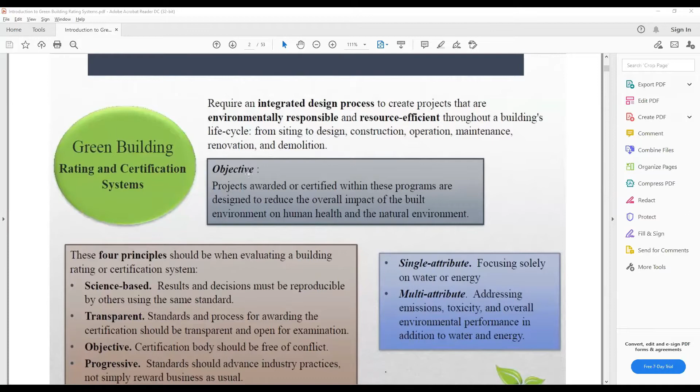Before discussing Indian rating systems, I'd like to start with where it all began. This is the first rating system that started in the world — it's a UK-based rating system called BREEAM, full form Building Research Establishment Environmental Assessment Method.

BREEAM is governed by BRE Global, the institute that governs this rating system. It started in 1990 in the UK, and now it has spread to almost 30 to 40 countries. Even in India they are trying to bring this rating system, like BREEAM India. But it's mainly famous in the European Union and EFTA, the European Free Trade Association countries. Currently, there are almost 530,000 certified developments under BREEAM happening all around the world.

What I called attributes earlier are mentioned here as categories. Every rating system will have its own categories. BREEAM has 8 categories. The building or project will be rated based on its performance under all these categories.

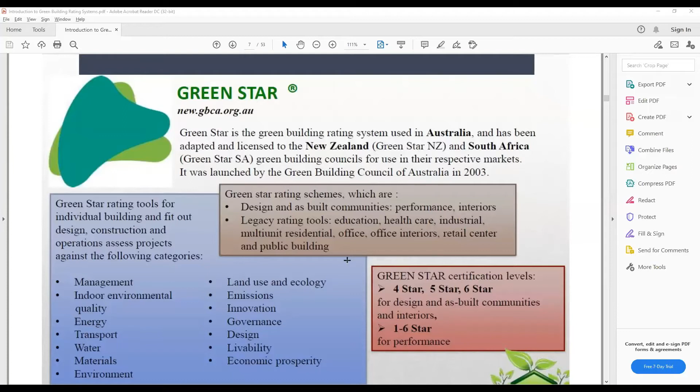Next is CASBEE. This is a comprehensive assessment system for built environment efficiency. This is based in Japan, established in the year 2003. It has 2 categories, and those 2 categories are divided into three sections each. Under quality, you have indoor environment, quality of service, and outdoor environment of the site.

And under loading, what can you do quantitatively - energy, resource materials, and outside environment come under loading. This loading part will exactly assess the environmental load through these sections. But the quality part will see things in a qualitative way - indoor environment means you can say the indoor environment is good, better, or best, like that.

In energy you should say the energy is 14 kilowatt hour or 15 kilowatt hour, like that we can say. So this CASBEE has 5 levels, S being excellent and C being poor. Anything above B minus would be good in this CASBEE certification.

Next is WELL. This is a single attribute rating system. This focuses only on the health and well-being of humans. This is the only standard that is purely focused on human health and well-being. It has almost 100 criteria with it, and based on these 100 criteria it will judge the building. It won't talk about energy or light or something like that - everything it will talk about in a qualitative way.

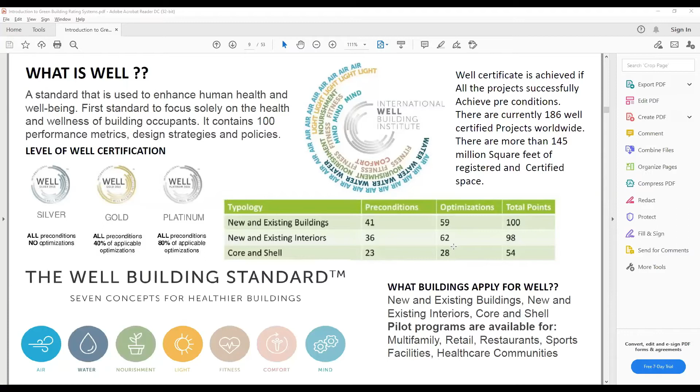Now the green building movement in India. The registered green buildings started in the year 2001, with CII, Confederation of Indian Industry office headquarters in Hyderabad. That is the first green rated building in India, almost 20,000 square foot, and it is a LEED platinum rated building.

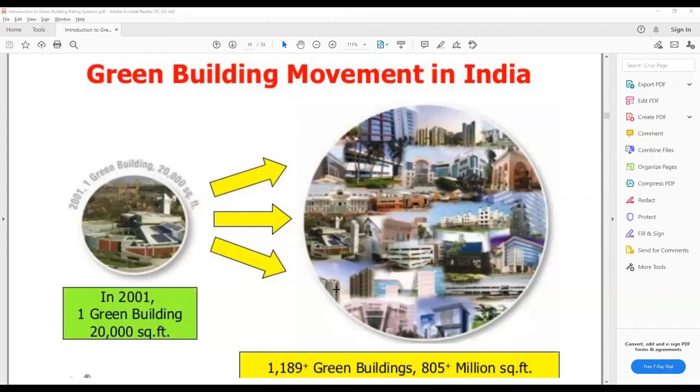After that, it grew to around 1,200 green buildings and almost 805 million square foot. This statistic is from 2011, the last decade. Now it has reached almost 4,000 to 5,000 buildings, and we are touching that range now.

But throughout the years, if you see 2004, 5, 6, 7, 8, almost by 2009 itself, the increase in cost percentage was only 2%. This happened because it was the first green building built, so there was a lack of technology and knowledge. But through many trial and errors, research and support, the cost percentage came down to almost 2% now, which is very nominal, because this 2% comes back to us as payback period.

This is the first rating system formed in India, the Indian Green Building Council, as part of the Confederation of Indian Industry, CII. It was formed in 2001.

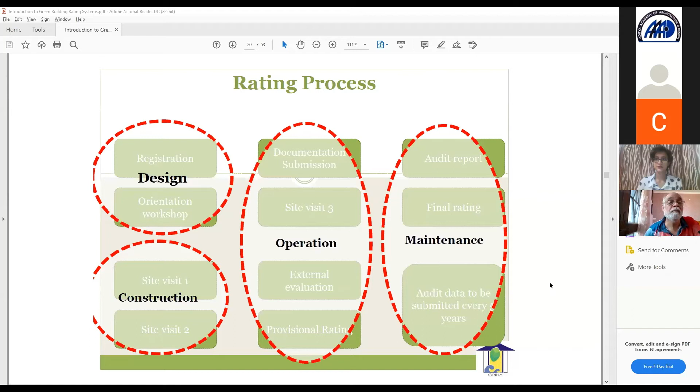Some key features of the Griha rating - it adopted codes like NBC, ECBC, MNRE, and the Bureau of Indian Codes and Standards. Griha studied all these things and tried to implicate all these codes in its manual, so that the building will perform well, because all these codes have been developed to promote good for the buildings only. So Griha tried to implicate this also in its manual, and it is in sync with the objectives of the National Action Plan on Climate Change. Following Griha is like addressing issues on climate change.

Another feature is the performance and percentile based rating system. It will show, for example, that this building is 30% saving water, 40% saving energy, 20% saving emissions, like that. And then it has non-applicability clauses.

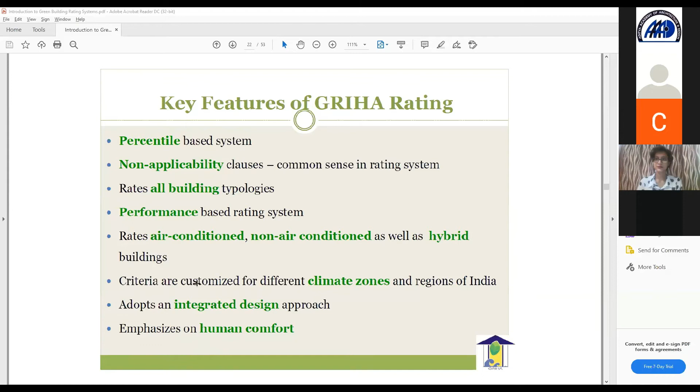This is how the points weightage is given. These are all the categories followed in GRIHA: site planning, energy, occupant comfort and well-being, water, sustainable building materials, construction management, solid waste management, socio-economic strategies, and performance monitoring.

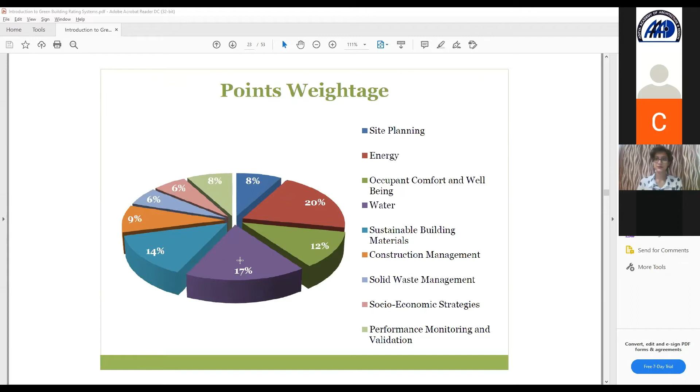If you see, the first weightage is given to energy. In any rating system you check, energy, water, and materials are given much more importance compared to other criteria, because if you achieve good performance in these, you can stop a good amount of carbon emissions and environmental impact and degradation.

So this is what I said - on my left side, these are the categories: site planning, construction, energy, occupant, water, and this is the criteria. If you see under the site planning category, I have 4 criteria, and those 4 criteria are accounted for 8 points.

Under construction management, I have 3 categories, and these 3 categories are weighted for 9 points. So like that, each and every category will have its own criteria and its own point accountability.

Under site selection, it will say if a site is close to amenities like groceries, parks, ATMs, hospitals - within a 5 kilometer radius - then your project will be given 1 point. Then if your site planning promotes low impact design, you will get 4 points.

Design to mitigate urban heat island effect, and site imperviousness factor - meaning if you have more ground coverage area, you will get 1 point. So everything, if you see in detail, it goes like that.

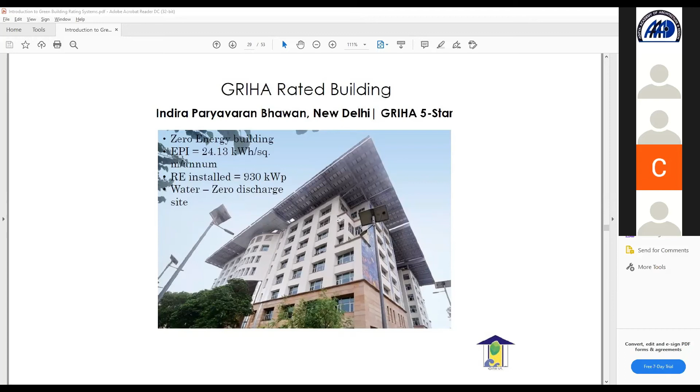Some of the other key flagship projects of GRIHA are IITs - all new IITs, Hyderabad, Ropar, Jodhpur and others, coming under GRIHA. Indian Institutes of Management like Udaipur, Tiruchirappalli, and Kashipur are coming under GRIHA. Central universities from Jammu, Rajasthan are coming under GRIHA. And the International Academy in Kidwai Nagar redevelopment in New Delhi is also coming under GRIHA. And then Raksha Shakti University Ahmedabad, and South Asian University - these are all key projects registered under GRIHA, and it is happening now.

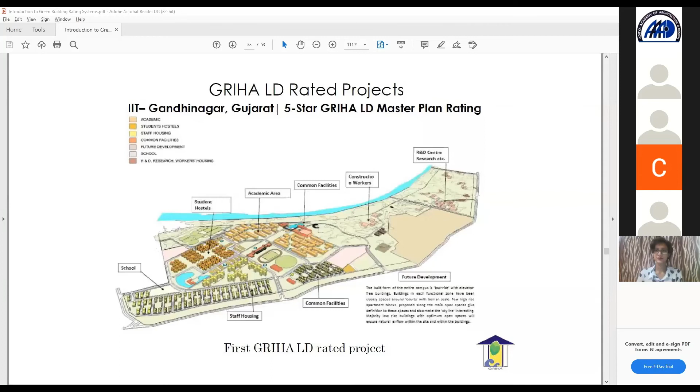And this is CP. So all these rating systems will have their own professionals to carry out all this work. For all these criterias, you have to take photographs, you have to make documents. Every criteria will require its own documents.

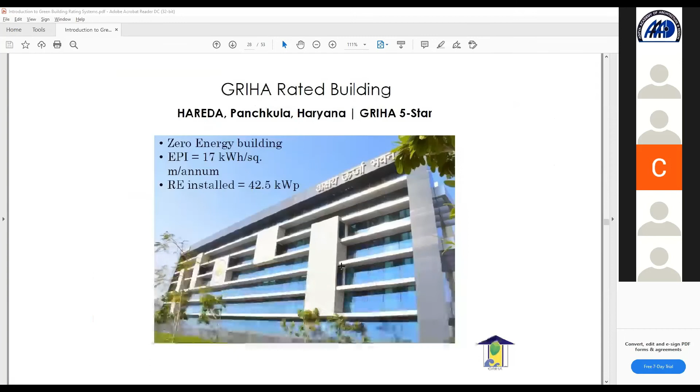For example, if you say site selection, you are eligible - you have to take photographs, you have to do proper documentation, and you have to submit to them, to verify all this. And to implement all this rating system would require professionals - that's where the certified professionals come into play.

So every rating system - GRIHA has CP, IGBC has AP, accredited professionals, and then BREEAM has CAP. So any rating system you take, there will be certified professionals in the rating system who have to go through some process. Every rating system has its own process - they have to go through that process and clear the requirements given by the rating system to become the certified professional. For GRIHA...

If you have an undergraduate degree in any technical stream - say civil engineering, architecture, electrical, mechanical - you are qualified to write for GRIHA, you are qualified to become a certified professional. And if you are not in those streams but still interested in this, you can apply, but you should have a minimum of 2 years of work experience in the related field.

Okay, so how to become a GRIHA CP? You have to attend a 3-day training program, which will cost around $6,500. After attending this training program, it's now become a 5-day online program, 9 to 1 like that. You can check the GRIHA website for further information.

After completing the 5-day training program, you will get a username and password. You have to use this to log into the community portal, where there will be sample papers and steps. Then you register for the exam, and after passing it, you can become a qualified certified professional.

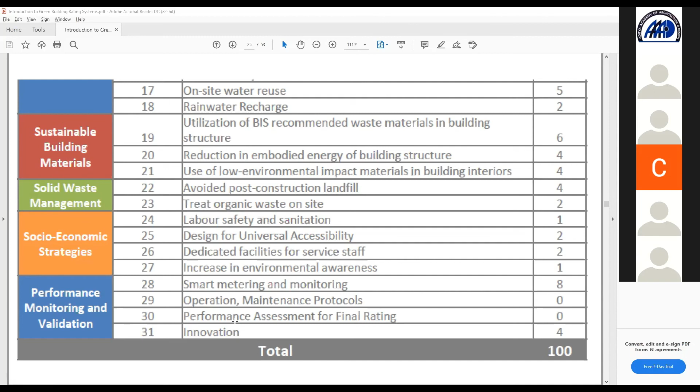So if you become a GRIHA CP, the benefits include innovation points. Under the innovation category, if a certified professional is working under your project, this project will get 1 point, similarly for IGBC and every rating system. If a certified professional works on your project from start to end, you get 1 point for your building.

For all these training programs, once you become part of the GRIHA training program, you can also get discounts for national summits and similar events.

This is Indira Paryavaran Bhavan. This building is special because it has both GRIHA 5-star and LEED Platinum ratings. It is located in New Delhi and serves as the office for the Ministry of Environment and Forest. It's an office type building with 600 occupants, working almost 9 hours a day.

It's located in a composite climate, with ground coverage of almost 30% only, reduced as much as possible. Its orientation is north-south, which is typical for composite climate.

This orientation reduced heating and energy consumption, and it has an optimum window to wall ratio. Its specialty is that almost 75% of its floor space is daylit, reducing dependency on artificial lighting. It used optimal glazing with low U value, high visual light transmittance, and low solar heat gain coefficient, which helped save energy.

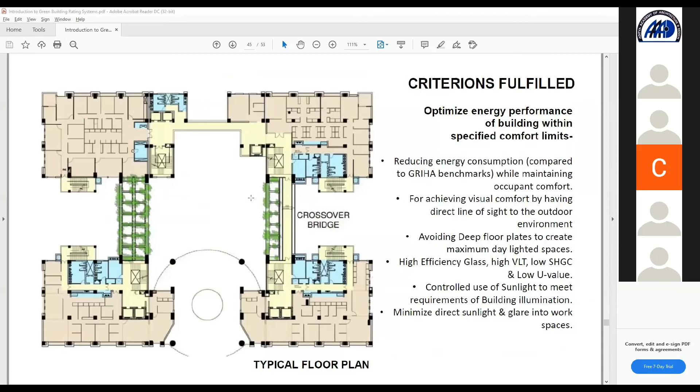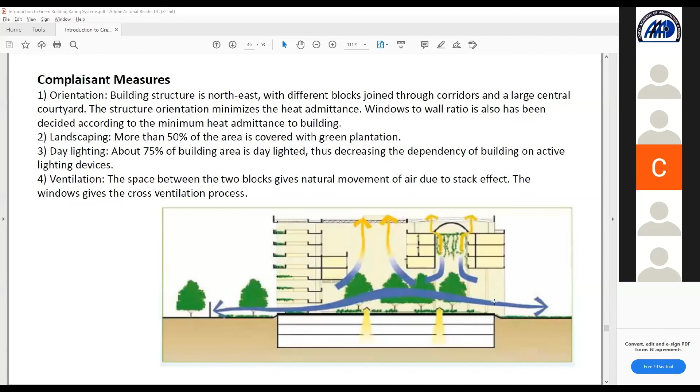This building has an indoor courtyard that works with the stack effect, bringing good cross ventilation and helping sustain the microclimate of the building. This is important for a building located in a composite climate, as it has to withstand harsh summer and harsh winter.

So this building has the largest...

This building has the largest solar power installation in the country, producing almost 70% of the building's energy consumption from the solar panels themselves. The entire roof is covered with solar panels.

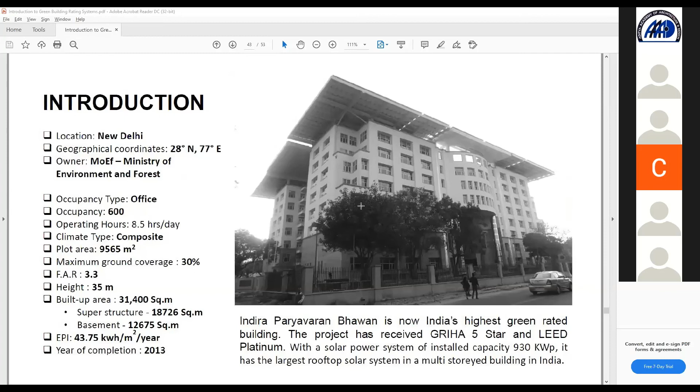This building also has zero water discharge. Not a single drop of water is let out of the site; all the water is collected and reused. This is a typical example of a net zero energy building in our country.

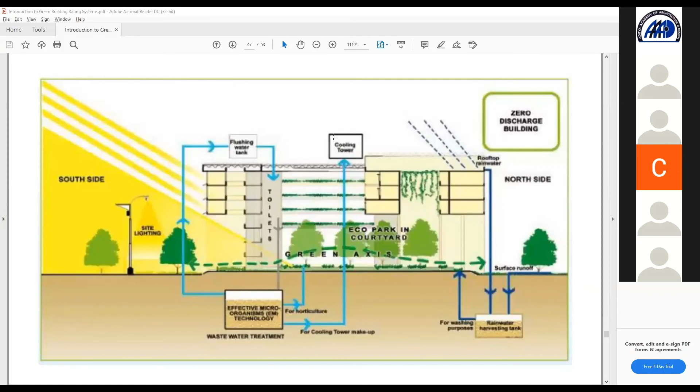These are some other rated buildings in India. This is Biodiversity Conservation India Limited, BCIL, Bangalore. It has LEED Platinum. This is the Suzlon One Earth building.

Suzlon is one of the major energy producers in India. They produce renewable energy for our central government. And this is Olympia Tech Park in Chennai.

This is LEED Gold. This is a school in Ladakh, also LEED Gold. This school functions totally on renewable energy alone, so it's famous for that.

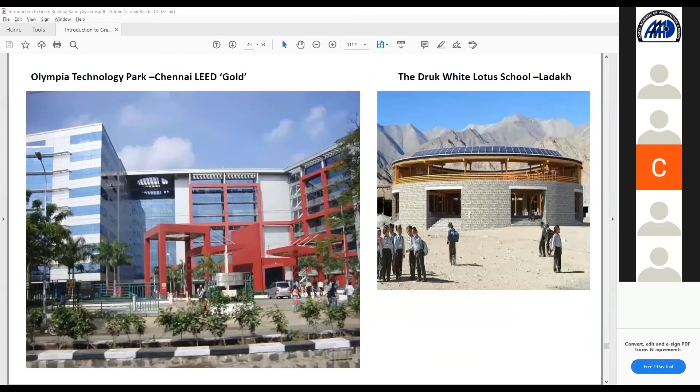This is the ITC Green Centre in Gurgaon, a Platinum rated building, one of the older platinum rated buildings. This is the Raintree Hotel in Chennai, the first eco-sensitive hotel, also LEED Platinum.

This is the first green campus, Doon School in Dehradun, also LEED Platinum. This is Rajiv Gandhi International Airport, Hyderabad, LEED Silver. And this is a LEED Gold rated building, the Nokia office in Gurgaon.

These are just a few of the many green rated buildings in our country.

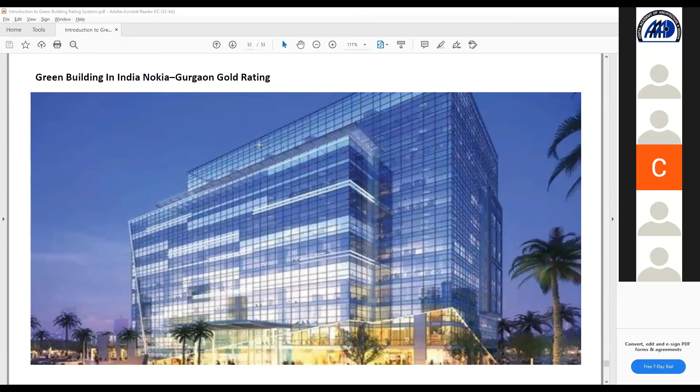So what is my role in this green ratings field? As you heard in the introduction, I am a sustainable architect. I finished my master's in sustainable architecture from SPA Vijayawada, and I have almost 3 years of experience as a teacher, and I am also practicing as a sustainable architect since I completed my degree.

Ever since I completed my degree, I have completed all these exams: GEM CP, GEM Griha, IGBC, and also one rating system from Sri Lanka, but it can be used in our Tamil Nadu too.

Because, as you know, if you want to register your building and get it rated, you have to pay registration fees, and those fees are considerably large. For IGBC and Griha it's okay, but for LEED it's larger. IGBC and Griha fees are also increasing nowadays, but in countries like Sri Lanka, where the GDP value is less than ours, I chose this rating system, and surprisingly they also implemented many good features in their rating system.

Most of all, by learning these rating systems, we can understand how to make our buildings green and reduce the impact. Because as architects, we are responsible to be responsible citizens and responsible persons in society.

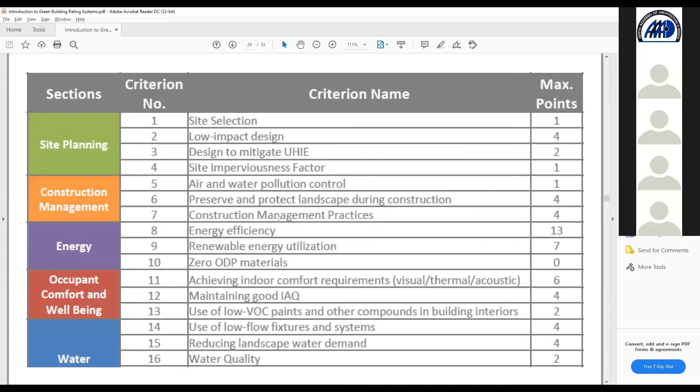It will be surprising how much your building will rate, so just check yourself—you can check like this. And students who are in their final year thesis, you can take up some green rated design and challenge yourself by designing green buildings, rather than going for a regular one, since across 9-8 semesters you'll be designing the same kind of project. For now, at least change your perspective and try to involve yourself in this. Yeah, that would be it.

Thank you, sir, for a very interesting presentation. We shall now move ahead to the Q&A session. So the first question is, what is the future: green buildings or smart buildings, or a combination of both practices?

I think I would say a combination of both practices, because I didn't say green buildings can't be smart buildings. Green buildings can be smart buildings, but smart buildings can't necessarily be green. So we should try to design a hybrid building which is green and smart.

What are the various factors that should be considered while designing a green building in rural areas? In rural areas, you should check for local availability. Based on that, if you start from scratch and begin the design, it would be good. Because if you try to involve too much technology, you will automatically involve so much transportation, which is not good for our environment. Transportation equals emissions. So if you're going to build in rural areas, the first thing you should do is figure out how to minimize the resources and stuff.